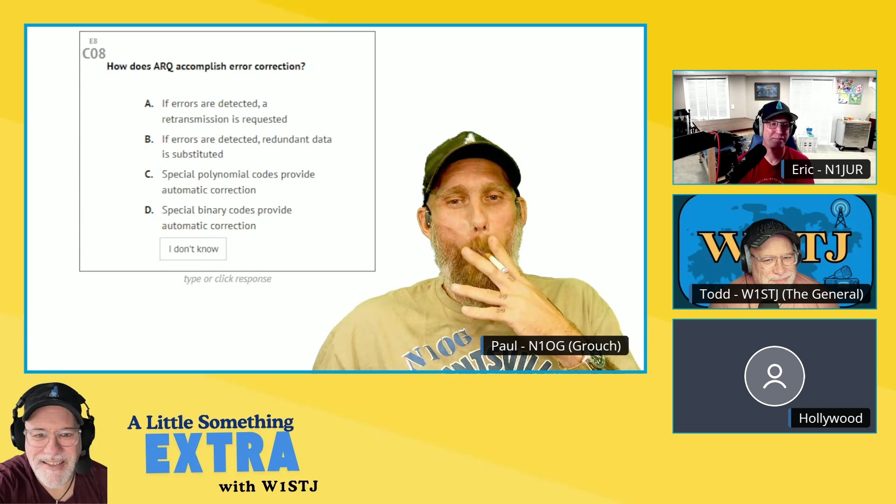And Hollywood, if you'd like to jump in after Todd answers, feel free. Because of course, this one wasn't on anything I've seen in the last 2 weeks, even though I'm studying all of them. But for some reason, I think it's C. Hollywood, would you like to chime in? I don't have a clue. I only fix 50 kilowatt transmitters. Oh, there we go. That solves that problem. Oh, man. I'd have to go with A. I'm almost positive it's an error correction. Obviously, it's in the name.

All right. So Todd said C, and C is incorrect. Eric said A. Ooh, my modem days still stick with me. Bring on AOL. The correct answer is, if errors are detected, a retransmission is requested. And so to further explain, in automatic repeat request ARQ systems, the transmitter sends the data and also an error checking code. The receiver checks for errors and requests retransmission of erroneous data.

The key thing to understand is just in the name, automatic repeat request, sometimes automatic repeat query. It automatically requests that the packet be retransmitted when it detects that the previously received packet was corrupted.

So your hint, when you see ARQ, think request. That's good. Maybe that'll help you. Okay. Or just when it says error correction, just remember retry. Fix the error.

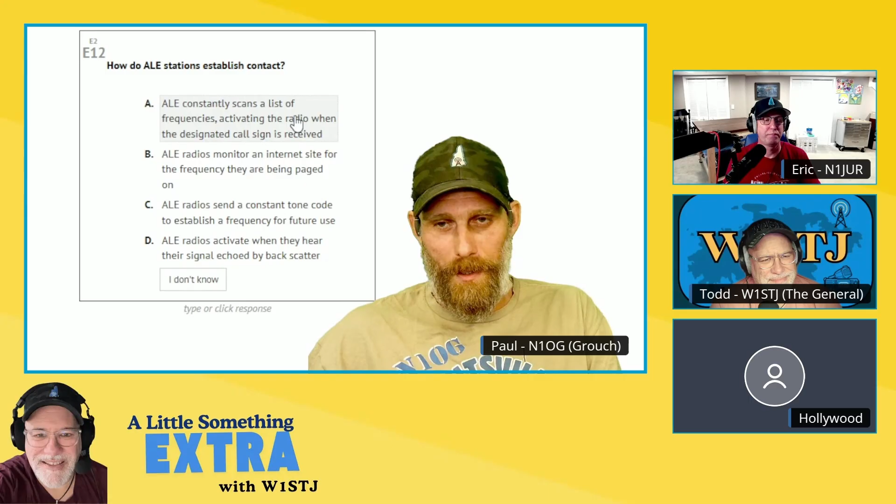All right, I believe it's A. I believe so, sir. You are correct. All right, Todd. Final answer is A. ALE constantly scans a list of frequencies activating the radio when a designated call sign is received. Is correct.

Trifecta for this, buddy. And now I got to hear the damn song. You got to hear the song.

You screwed that pooch tonight. See, Hollywood, so I can't win. If I don't get all of them right, I'm a loser, right? If I get them all right, then I'm good. But if I get 2 out of 3, I got to hear the Meatloaf song. And normally when I get 3 out of 3, Eric misses one, and we still got to get the song. But I'm still an extra. Either way.

So for those that may not know, ALE stands for Automatic Link Establishment, which is the standard for digitally initiating and sustaining HF radio communications in an automated manner. You can think of it as an automated way of calling a specific station and answering that call. When attempting to call another station, an operator enters an ALE address into the radio. The calling radio selects the idle channel, the frequency in its list, and transmits call messages.

On the radio waiting for the call, ALE constantly scans a list of frequencies, activating the radio when the designated call is received. And ION2G is a phenomenal program if you want to learn ALE and get into ALE. It's a wonderful thing. Caveat, you do have to have an auto tuner because it's switching frequencies in a random fashion. You definitely want to have an auto tuner that will tune each frequency before it transmits. Yeah, so there we go. Cool.

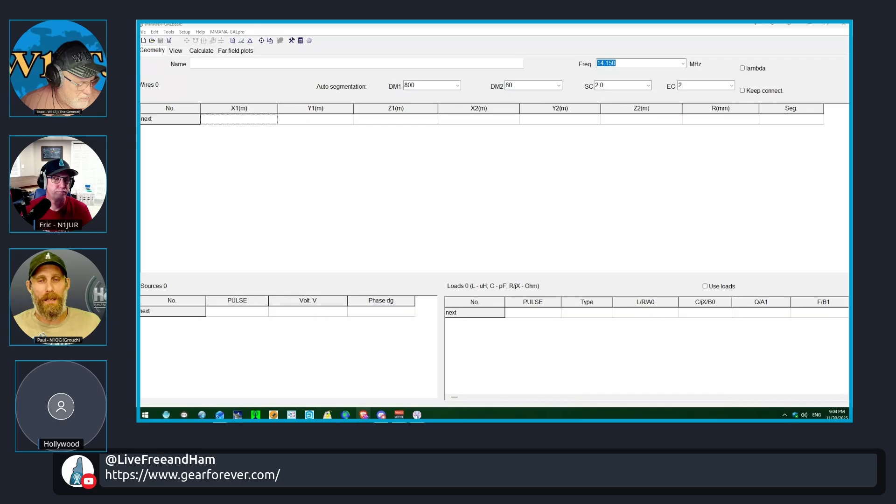Excellent. Okay. So when you launch the software for the very first time, this is what you see. And so Hollywood, where do I go from here? Say I want to understand. Now I had a dipole at my house, and initially the dipole was 40 feet off the ground, and it was 75 feet in total length. And then eventually I upgraded to a little bit better of a dipole that was 140 feet in total length, and I put it 65 feet in the air. So how could we understand the difference between those two setups and what advantages or disadvantages may be at play there? Okay, sounds good.

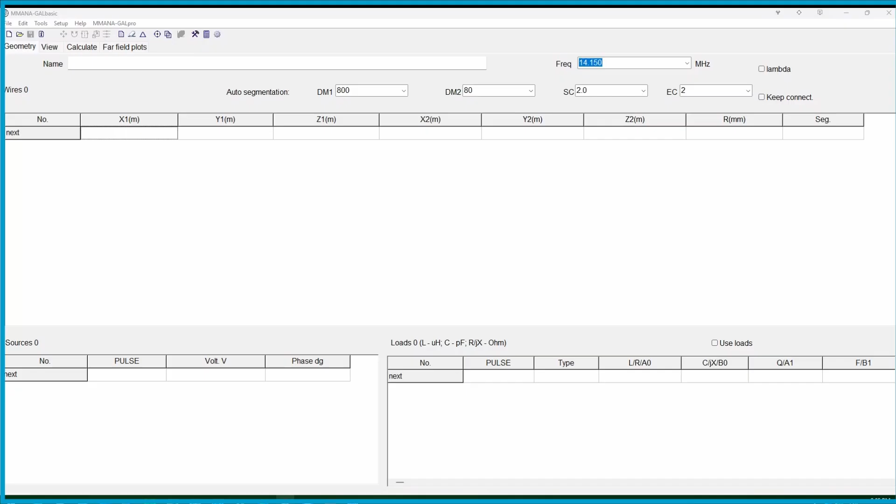So that's exactly what this software is designed to do. This is not the best software that's out there. This is certainly not a real engineering piece of software. It's basic stuff for the ham radio community. I use it all the time. It works great, and it's easy to do. So the first thing that I would recommend, on the screen, at the upper left-hand corner, you'll see 4 tabs: Geometry, View, Calculate, and Far Field Plot. Click on View. Because View, well, let's start there.

This is a 3-dimensional palette, okay? So you've got an X coordinate, a Y coordinate, and a Z coordinate straight up. So this is our blank piece of paper that we now need to draw an antenna on, and then MMANA-GAL will use that information to give us where the currents are going down that wire and what the radiation pattern is expected to be. So this is step 1. We have to draw the antenna first.

Okay. And so what do you suggest that we start with as an antenna? I would do a dipole. Do a simple dipole. Okay. Nice and easy. Yep. And so how would we go about that? Okay. So at the very, you got it. At the very top, it says Wire Edit. Go ahead and click on that.

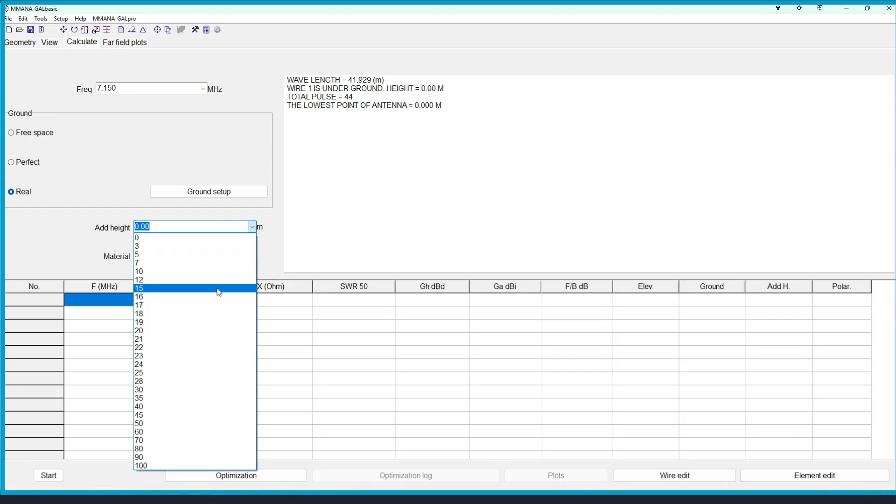So once we've told it that it's not up in free space, it's on or above the earth, we need to tell it how far above the earth it is. So pick a random number, something realistic. I'd do 10. 10 is 30 feet. Yep. Perfect. That's what we need to do. So now we've got our program ready. We say run it, and in the bottom left is a button for that. And bada boom, it does its thing.

So now we've got to put our engineering hat on a little bit. If we look at this, it gives us a spreadsheet. It tells us what frequency went into the wire, what the ohms of the wire are, and the J factor, which is either capacitive or inductive. We can talk about that later if you like, because that's a little complex for most people.

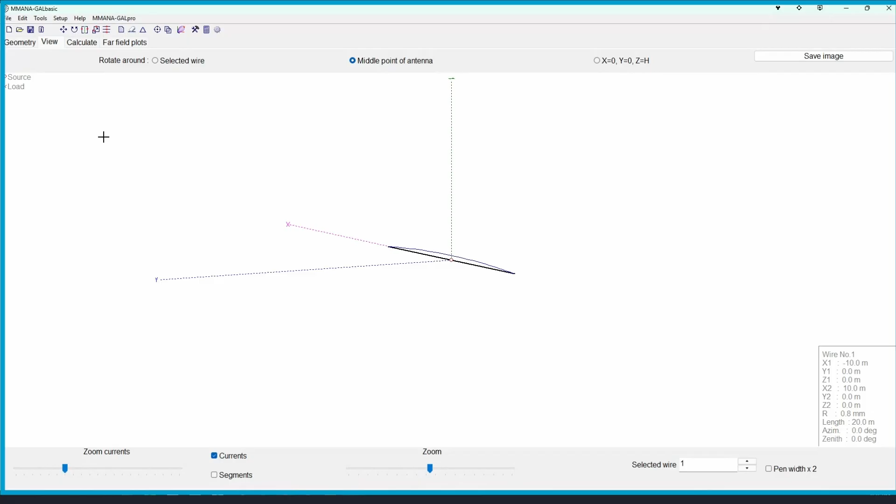Click on the View tab again, and it will show us where the current is on the wire. In the bottom left, there's a slider for zoom currents. You can move that to the right a little bit. On the left, it says zoom currents, the other control. Yep. Slide that over, there you go, just so it's easier to see. What do we got? We've got a half-wave dipole. The blue line is the current on the wire, not the voltage. Okay, that makes sense now. I think that was Eric, right?

So that's a key ingredient here that trips a lot of people up, because traditionally, like in the ARRL antenna book or even the big book, it usually shows the voltage, not the current. Right. So this trips everybody up. We know, without using the software, we've been told, and it is correct, that a dipole is a good match right from coax. Coax is 50 ohms.

A dipole is near 50 ohms. It's a good match. If we go back to Ohm's law, in order for it to be a good match, it has to be a relatively low impedance. The 50 ohms of the coax is a relatively, I'm using air quotes, relatively low impedance. The dipole is also a relatively low impedance. They match. They're happy together.

Okay? So makes sense. So Ohm's law, I'm going to go on a sidetrack, just a quick one here. E equals IR, right? If the resistance is high, you need more voltage to push through the resistance to get the current to flow. If the resistance is low, it doesn't require as much voltage to push through to get the same amount of current.

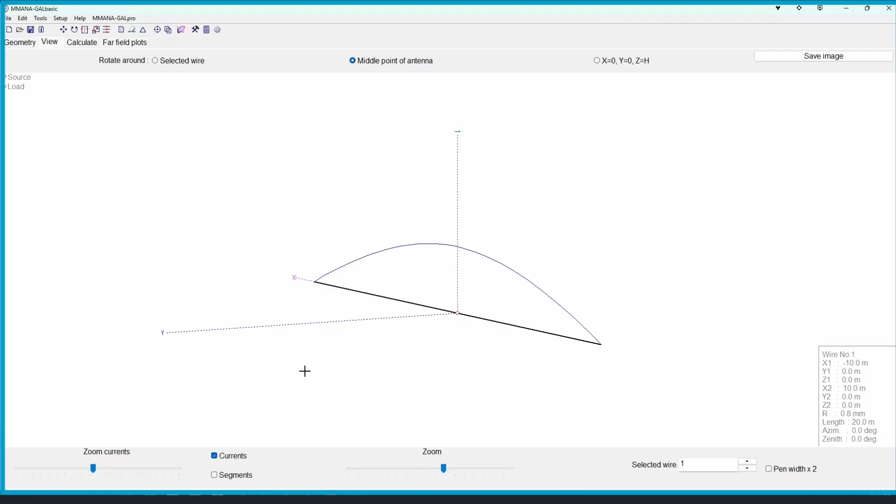Makes sense. Okay? So just by looking at this current curve, this blue curve, I can see immediately that the middle of the antenna is the low impedance point. There's maximum current in the center. And at the ends, there's very little current. Does everybody see that? Yeah, makes sense.

And voltage and current are like a seesaw. When one goes up, the other goes down by the same amount. So maximum current in the center, very little voltage in the center. Maximum voltage on the ends, very little current on the ends. One goes up, the other goes down. Okay? So this is a resonant half wave for 40 meters.

Let's now see, what does it look like? What can we expect for a pattern? If we click on far field plot at the top, that's the fourth tab over.

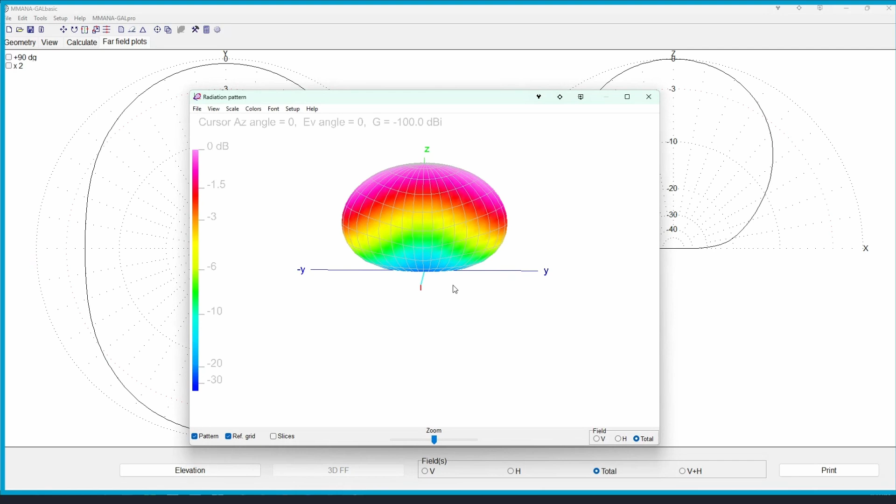So a lot of it does go up, but Callum made a really good statement in one of his, it must have been 2 years ago, videos, and I'll paraphrase it. And what he said was, when you're on the ground, you're an antenna. When you're on the ground, you're like a seagull. Your wings are tucked in tight. And as you start flapping to take off, your wings go out. Once you get up to a certain height, you can soar and you really stretch your wings way out.

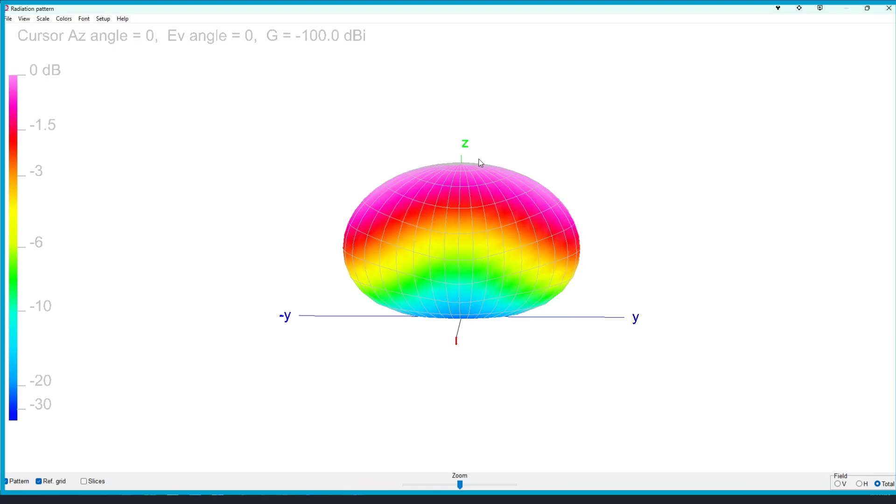The antenna does the same thing. When the antenna is low to the ground, it is physically shorter for the same frequency. And as it goes up in height, you need a longer wire. The wings extend further out for the same frequency of resonance. Mm-hmm. Okay. That makes sense. Okay. So that's a good visual. Think of that seagull thing. So this is where our signal is going.

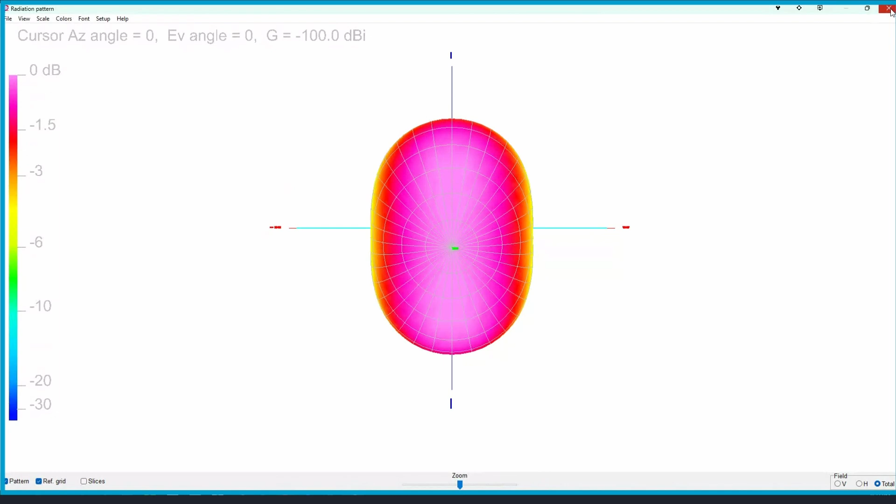In the white. Yeah. And we can draw chalk lines and we can measure roughly what the software is, how many dB gain, is it going here or there? Yeah, we can do that. You know what? In the real world, there are so many other variables that it almost doesn't make sense to do it. It's good to show off and say, well, I've got 2 dB more than you have. But in the real world, it's splitting hairs. You're not going to hear 2 dB. No, especially when it comes to S units. Exactly. It takes 6 dB to go 1 S unit. Yeah, so it's nothing on the other end.

So what I want you to walk away with on this lesson is, where does the signal go and where is the current on the wire? That's the 2 most important things for right now. All right? And where the current is max, that will tell you what the impedance is of the antenna. Let's change this right now, really quick. Let's make it an end-fed half wave. So we'll go to geometry. And under pulse, instead of W1C, we'll make it W1B, Bravo. That's now wire 1 at the beginning.

Question, is there a key somewhere? Knowing these little nuances of defining where your feed point is, are they listed somewhere? Yeah, they're in the manual. Okay. But we're men. We don't read manuals. Yeah, well, that's what I was kind of getting to. So what crazy voodoo did you have to learn? Exactly.

Yeah. So now we've got the little red circle down in the end instead of being in the middle. Right. So before we do the calculation, from what I've told you so far, pop quiz, what kind of impedance do you think it's going to see? And tell me why. Let's see here. Well, and you can phone a friend. I think it's going to be a much higher impedance because you're feeding it from the end. So it's no longer being balanced. Okay.

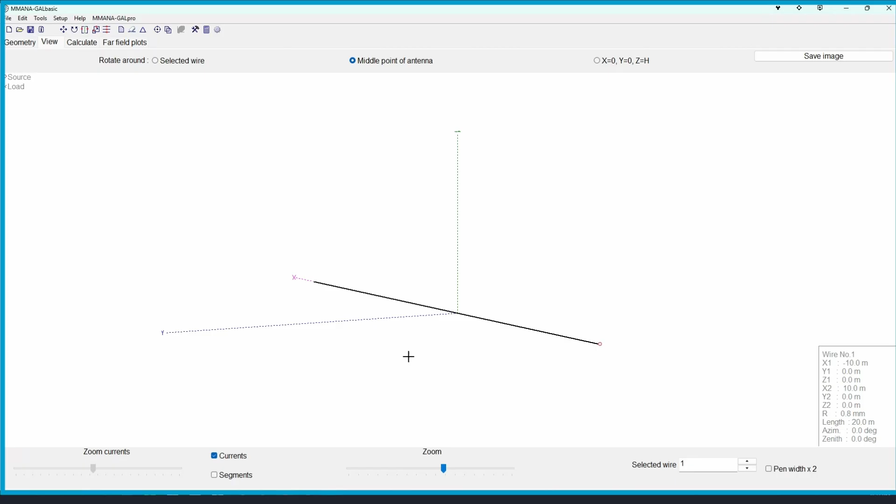Let's see. Go ahead and hit calculate. Place your bets. And then go back to view and look at it. And you may have to move that zoom all the way to the right. That's still in the middle. It's still in the center.

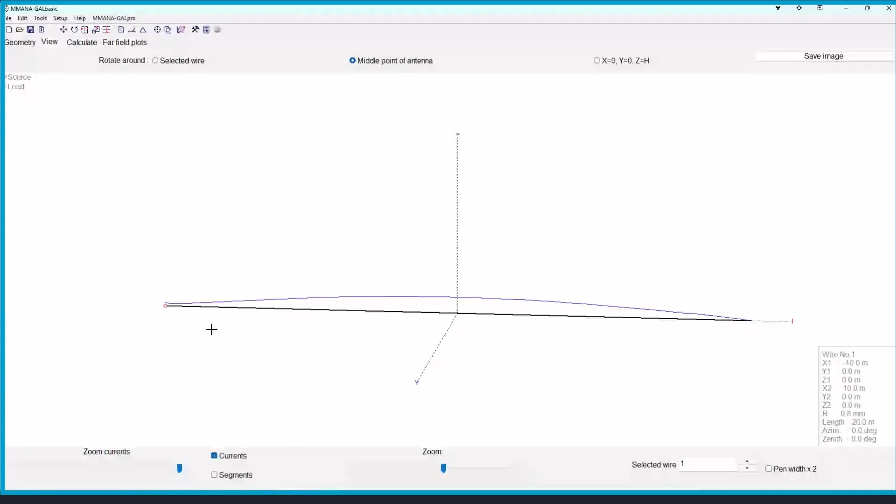Okay. So let me make this analogy. Do you guys play any instruments? Yeah, guitar. I haven't played in a while, but yeah. Perfect. Okay, I got my hand on the neck of the guitar. I'm playing a G note here, and I'm plucking the string. Does the note, I shouldn't say the tone, the frequency, does the note change where I pluck the string? Yeah. The frequency of the note changes? No, I'm talking about just the frequency. Oh.

It's the same note. Yeah, it should be the same note. It doesn't change. Okay, so the feed point is at what point on the string is my pluck hitting the string? That's the feed point. The length of the string is the frequency of resonance, which does not change. It doesn't matter where you pluck the string, you get the same note.

It sounds different. There's different harmonics to it. Right. But the fundamental note that's being played is the same. It's determined by the length of the wire. That's a really good analogy.

I'm a musical idiot. You know, like I learned how to play the bass guitar for a couple songs. But like as a musical idiot, right? That still makes sense to me because if I'm holding my fingers on the neck, it doesn't matter where on the string that I pluck. Right. It's going to make the same sound. Yep. Because the length of the wire that I'm plucking is the same.

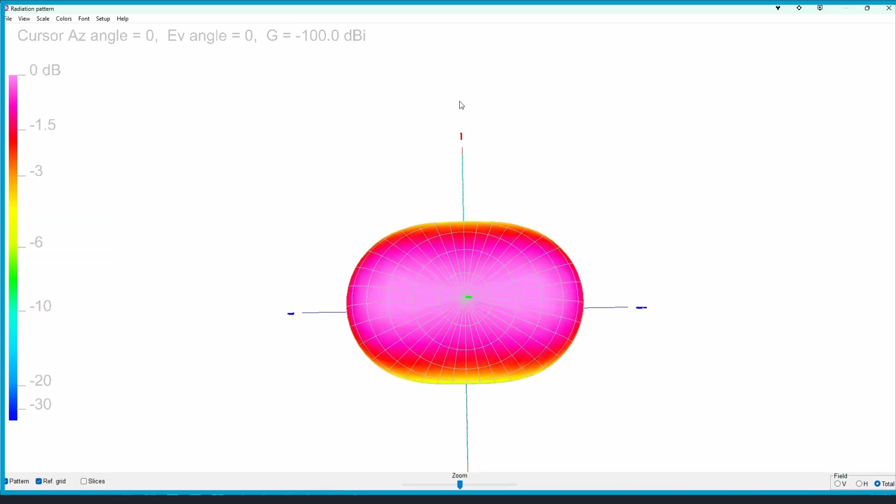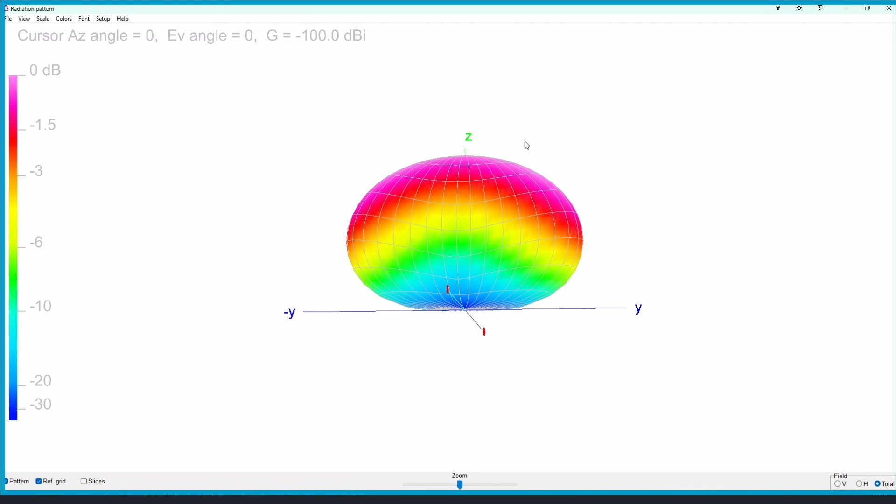It's identical. Yeah. So then here's a dumb question. No question is dumb. Go ahead. So basically it boils down to how much current or voltage you're putting into the wire, or whether you're transforming it up or down in order to change the radiating pattern, keeping the wire length the same, whether it's a dipole or an end fed, whatever you feed it more with in terms of voltage will change the rest of the wire, correct? Am I saying that right? I'm not sure I follow 100%.

Let me see if I can sum it up. And again, I'll go back to the guitar. It's where you pluck the string. So if you're plucking the string harder. Yep. What is that doing to the rest of the wire? The harder I pluck, that's like more amps, more watts going into the antenna. Okay. So if I've got the guitar and I pluck it in the middle, and I have a microphone with a sound pressure meter, and it reads 80 dB. Okay, I pluck it just so, and I get 80 on the meter.

Okay, and then I pluck it at the bridge. I have to pluck it harder to get the same 80 dB on the meter. Mm-hmm. Okay, so it's because there's more resistance at the bridge. So I need to overcome that resistance. Okay. Because the feed line you're feeding it with is 50 ohms. Okay, so we're going back to antennas, right? So if I feed it in the middle, it's a low impedance point. It's a lot of current right there that it will accept.

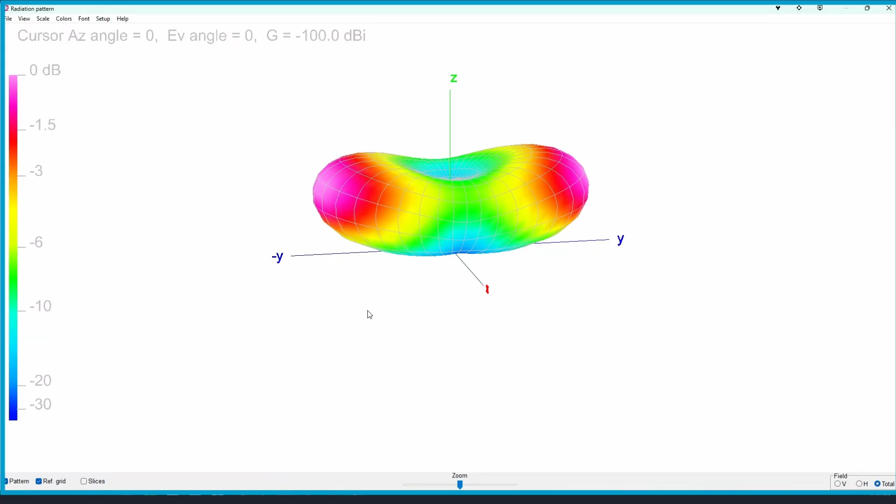Think of that wire as a light bulb. There's no shade on the light bulb. It's not a flashlight with a reflector around it, right? That would be a Yagi. This is just a naked bulb that I'm holding in my hand connected to a battery. The light goes everywhere. It goes up, it goes out to the sides, it goes down, right? If the ground were a mirror, and I put the light bulb a foot above that mirror, some of the light is going to go up from the bulb, and some of it's going to go down, hit the mirror, reflect and go straight up also. That's when the bulb is close to the ground.

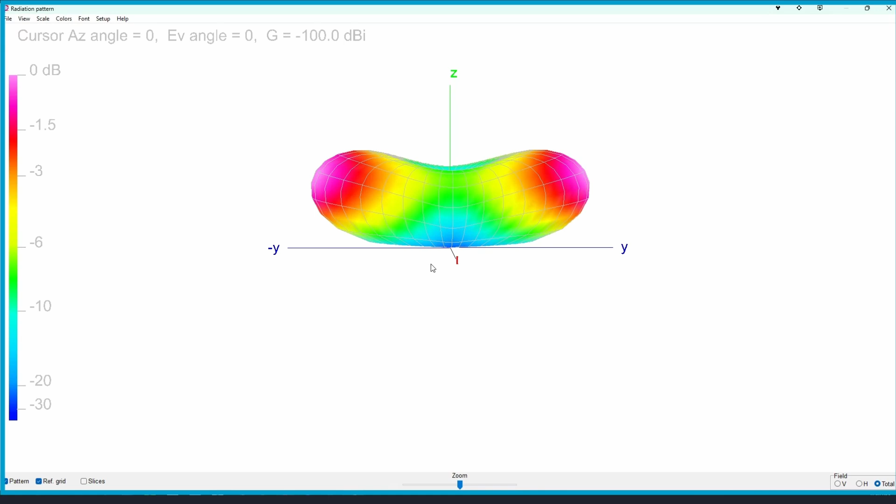So we're reflecting off the ground always as we increase the height? You're always reflecting off the ground, unless you're in outer space. The higher up you are, the less reflection off of the ground, and the more coming just from the wire. Well, question then: what does it look like in free space? Let's do it. Great question. Yep. Space. That's right.

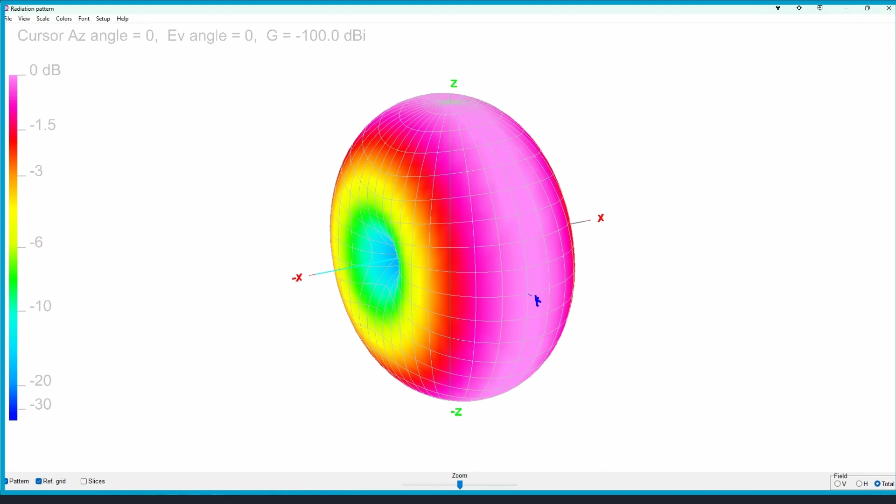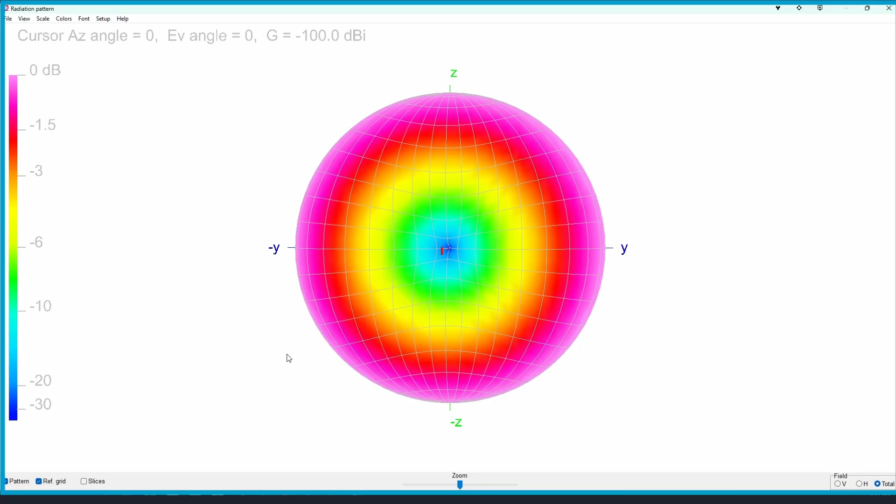Big giant RF. Perfect. Interesting. Look at that. Yeah, big donut. So you see what I said. If it was a bulb, the signal is going out of the bulb, it's going up, and it's going down. This is in free space. It's a satellite now. But notice there's no signal coming off of the ends of the wire. It's very narrow, because that's where the voltage is, not the current. It takes current to... Remember, radio waves are an electromagnetic field.

The second half of it is magnetic. And you need current to go through. Did you ever make an electromagnet with a D battery? Oh, yeah. You wrap a wire around a nail? If you disconnect the battery, there's no current and the thing isn't a magnet anymore. Right? So a lot of the RF, it needs both. It needs voltage and it needs current.

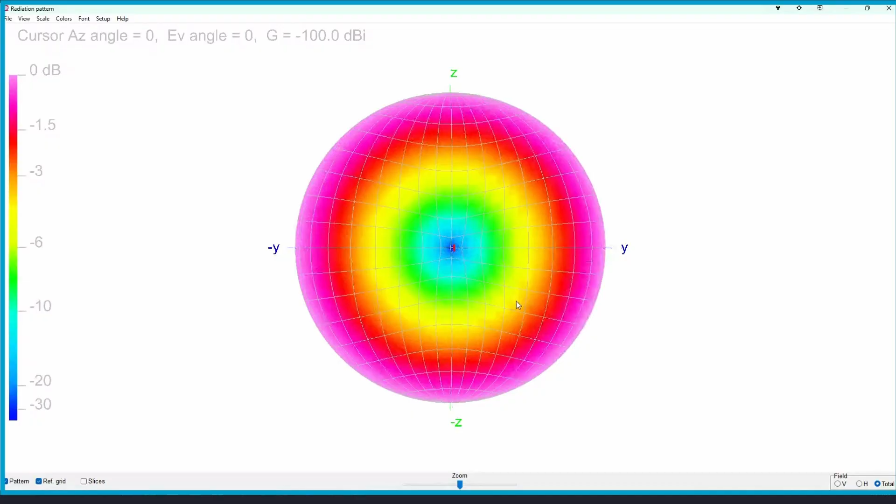So then why do we model in free space at all? What's the pro to doing it in free space? Bragging rights. Because it's theoretical. In free space, you can say how many dBi, and dB is decibels, and the I is short for isotropic radiator, which means what we just drew. It's a wire in free space, and that's not the real world. When you draw a dipole, that dBi becomes dBd for dipole, and you lose almost 3 dB right out of the gate.

Okay. Because the far field plot that we had before, on the y-axis, I had a 5.5 to 6 dBi gain. Whereas now we're in free space, it's maxing out at 2.2. Right, because it has nothing to reflect off of.

So is there diminishing returns in terms of height for an antenna? Oh, yes, absolutely. If you are a DX contest station, what they will often do is on the big tall tower, they will put a bunch of Yagis at different heights, and they will select them depending on where they want to talk to. They're all aiming at the same azimuth, but they're at different altitudes.

So that incoming wave from Europe might come in at a 10-degree angle, and you want to use the antenna at the top of the stick. But something closer might come in at a 30-degree angle. You want to use the antenna towards the middle or the bottom of the stick. Not the bottom, but lower. Correct. So it's a three-dimensional thing. That's a great question.

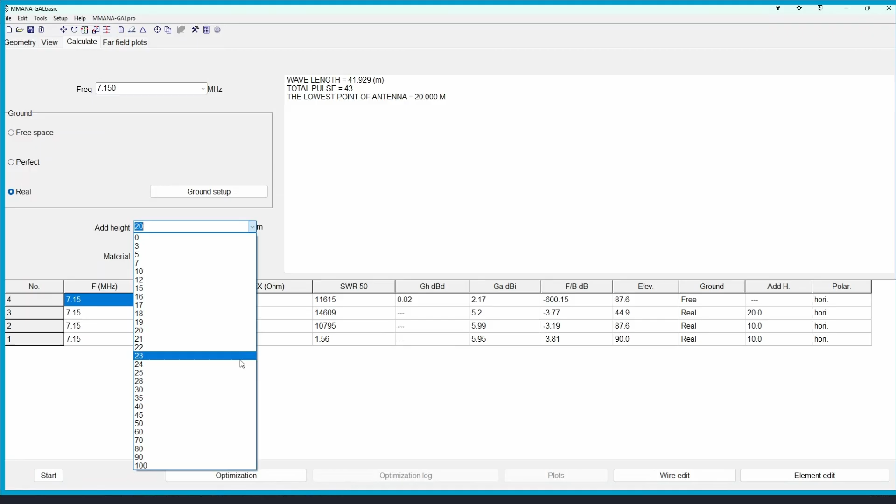So in terms of antenna, obviously physical limitations like trees would dictate why I would choose a dipole over an end fed, but with that eliminated as a factor, is one better than the other? Does it really matter? In my opinion, the dipole is more efficient because it's a monoband antenna. It's designed to do one thing and do it very well. Mediocre to good. It's not the best antenna, but it works every time, pretty much.

The end-fed antenna, its claim to fame is that it will work on harmonics. It will play the main note, but it will also play the second and the fourth and the eighth harmonic. And our ham bands are set up that way. So you kind of get a free lunch. So your end fed's giving you a little more versatility versus a dipole. However, it's not a perfect world, and the price you pay for that free lunch of using the other bands is that there are losses in the transformer.

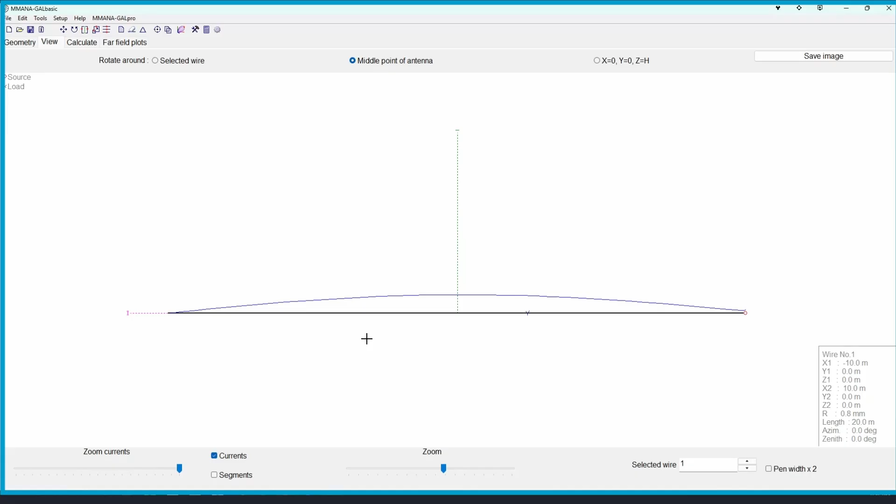And the end-fed half wave is a fixed height. You're shooting it over a tree limb, you're doing POTA, you're not changing the height. But when you change frequency, the electrical height of the antenna changes because the wavelength is shorter. If you're using it on 40 meters, it could be lower to the ground electrically than if it were 10 meters. So there are more losses. The lower you go, there are more losses generally.

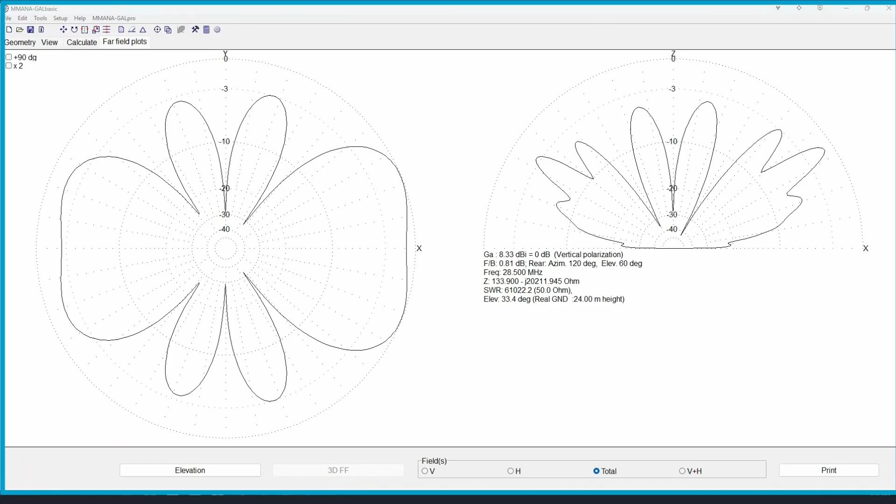Let's look at it. So what do we got? We ran it for 10 meters here, for 28 megs. So let's look at the 3D far field plot. And what we'll find is that there are what are called lobes in the pattern. It's not a nice, simple pattern. It's a whole bunch of fingers now because there's an interference pattern. The antenna is radiating on, what is it, the fourth harmonic now?

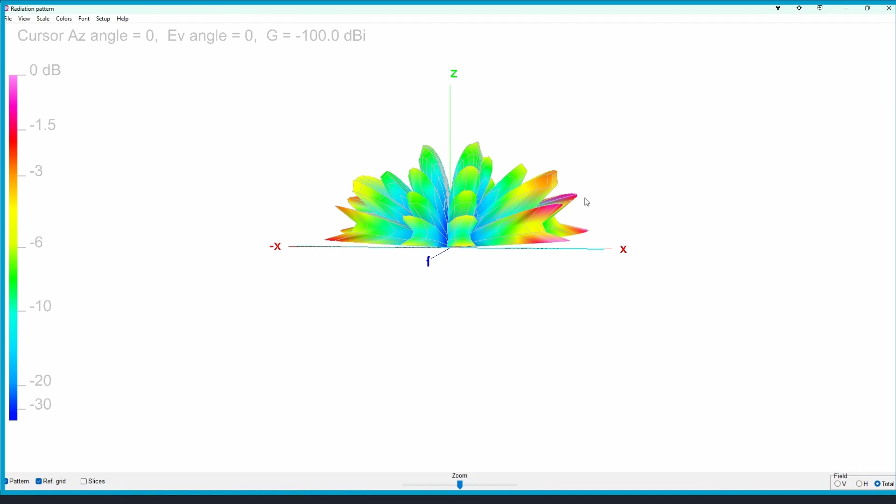And is that why we get the harmonics? Well, no, it's why you get the interference pattern. Ah, okay. Because this is as though I had 4 dipoles, but they're not all firing at the same time. Number 4 is the most delayed, and number 1 is the least delayed. Just on a sidebar, this is kind of how phasing with verticals works.

Yes. Okay. Bingo. Right. That makes sense. Now it's clicking. Yep. Okay. The light is turning. Good. I love it. Okay.

So this is just a simple piece of wire, but yes, it has a phase delay. So if we feed it a 40 meter signal, there is no delay because it's only one hump. And if we do it at 20 meters, there's 2 humps, so one will be delayed behind the other. The higher the harmonic goes, the more humps there are, the more delayed the one at the end of the string is from the one at the beginning of the string.

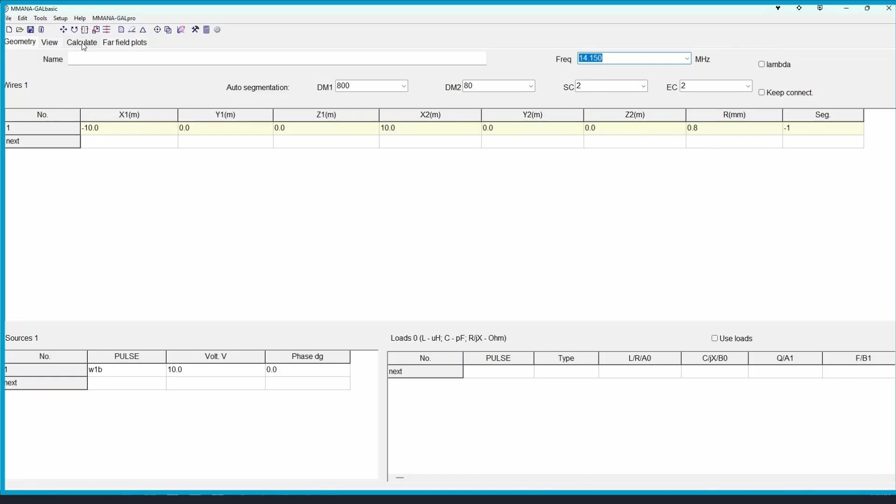So there's an interference. It's just like dropping 2 rocks on a pond. If you drop them at the same time, you get a certain interference pattern. If you delay one a little bit behind the other, it changes that pattern. And that's what MMANA is really good at. So using your rock analogy, you drop the first rock in, it creates its circle. Then the second one, until it starts to intersect those other circles, at that point that's where the phasing and interference comes in.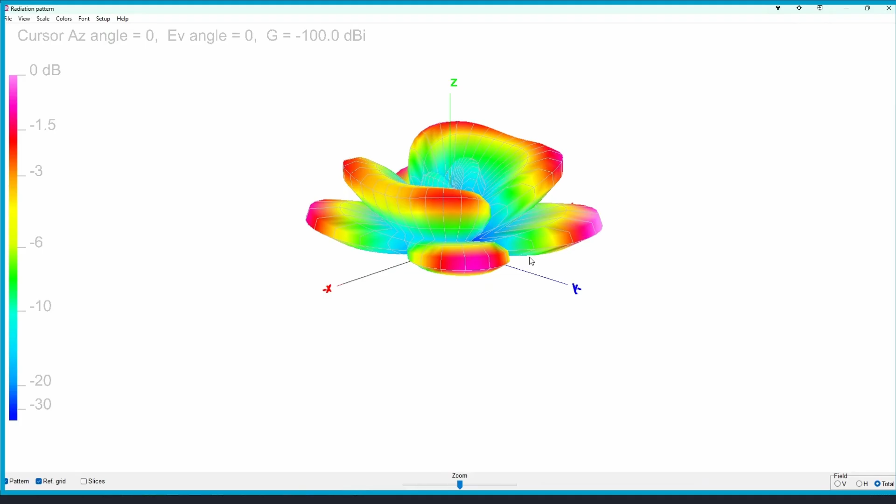Got it. Exactly. It's just that simple. It's hard to conceptualize, but once you get it, then you can plug it into the software and you can kind of guess what it is going to do. And then you confirm it. A practical application, how does that affect the performance of the antenna?

These interference points. Okay. So what my mentor told me, and I'll repeat it here, is you build an antenna to put the maximum signal at the target. That's your first goal. Once you've done that, then you match it. You make it play on X number of bands, and you have a good SWR. So those come after. But the first thing is you have to get the signal to go where you want it to go, at the best efficiency. That's the primary goal.

Makes sense. Because if we do it backwards, if I say SWR is the most important thing, guess what? I have a dummy load that does that. My dummy load has a perfect SWR. It doesn't radiate, but it solves the problem. It has a perfect SWR.

Well, it's funny you said it because I've been a ham since '93, and that was always the factor that was drilled home all the time. Make sure your SWR is as low as possible before you even start to transmit. And now that I get into this phase, it's really just that the coax and the radio want to be able to talk to each other happily, and that's all it boils down to. Right. There's 2 main reasons why that's drilled into our head.

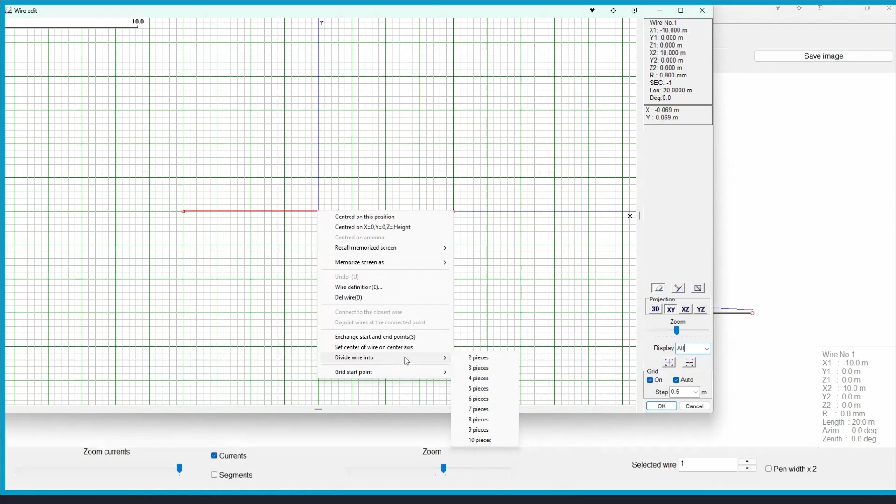What we're going to do is we're going to right click on that red line. And we get a pull down menu. And we're going to select divide. It's down toward the bottom. Divide. Let's cut it in half. Divide by 2. And then let's grab the middle and pull it up. Yeah, and then release it. There you go. So it's over the tree branch, or it's on a carbon fiber pole, let's say. Click OK.

What did we do? We've got it lying on the ground. We need to spin it. Okay, we can do that. Easy. Up at the top, above the word calculate, there is an icon to the left of that, that's rotate. Click on rotate. Let me think, we need to rotate it by 90 degrees. The question is, is it on the Z? No, it's on the Y. So click on Y. And it automatically defaults to 90 degrees. Doesn't matter whether it's clockwise or counter. Click OK.

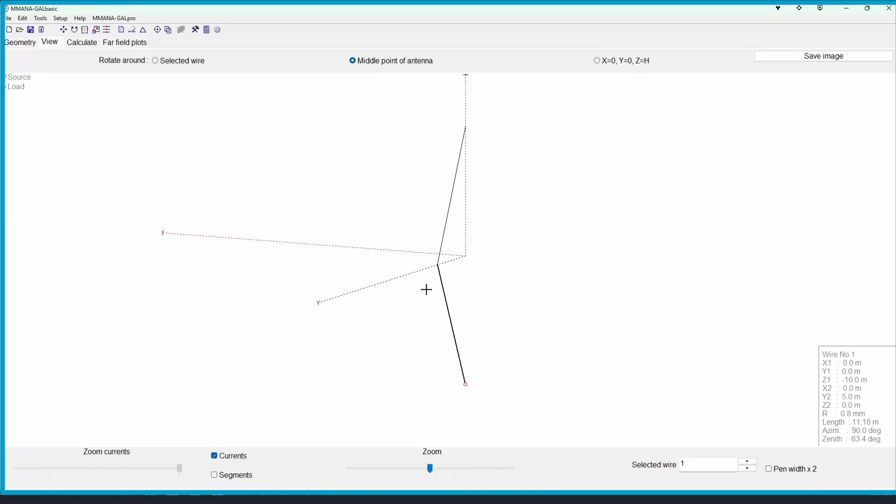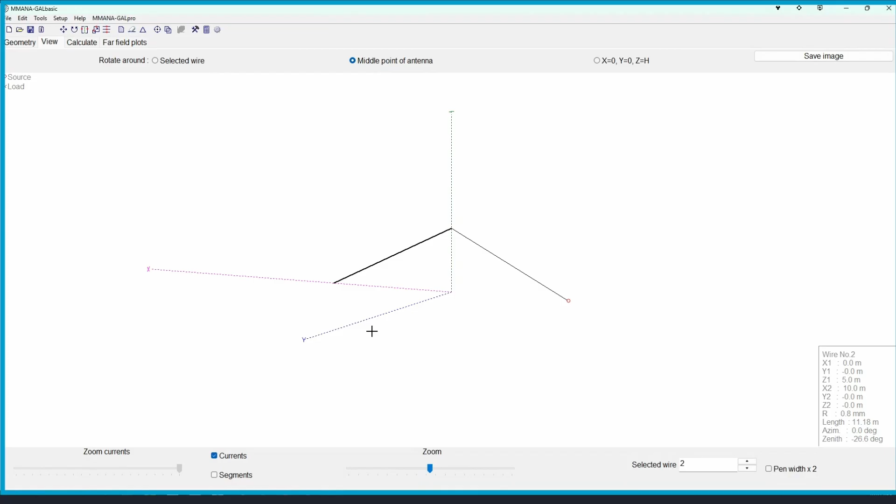Still didn't go the right way, did it? No, it must be Z then. Try a whole bunch of things. You'll get it right. That's what I do. So click on the rotate button up top. We'll go back to Y. Go clockwise. We get it back to the way it was. How about X? So X, 90 degrees, counterclockwise. There we go. You got it. That looks more like it should be.

Now, the next thing we need to look at is when we go to calculate, I think we still have this in free space. So, it's in real. Okay. So let's lower it to a normal height. And this is the ends of the antenna, the lowest point. I don't know where you're putting it up, Paul, but if you're at POTA, you're not starting the antenna at 30 feet off the ground. The middle might be 30 feet.

So I would recommend, for right now, in add height, type in the number 1, because most people have got it pretty darn low to the ground. And then remember, these are in meters, so 1 meter is 3 feet. Which is for an end fed half wave in an inverted V, 3 feet for the feed point is perfect, in my experience.

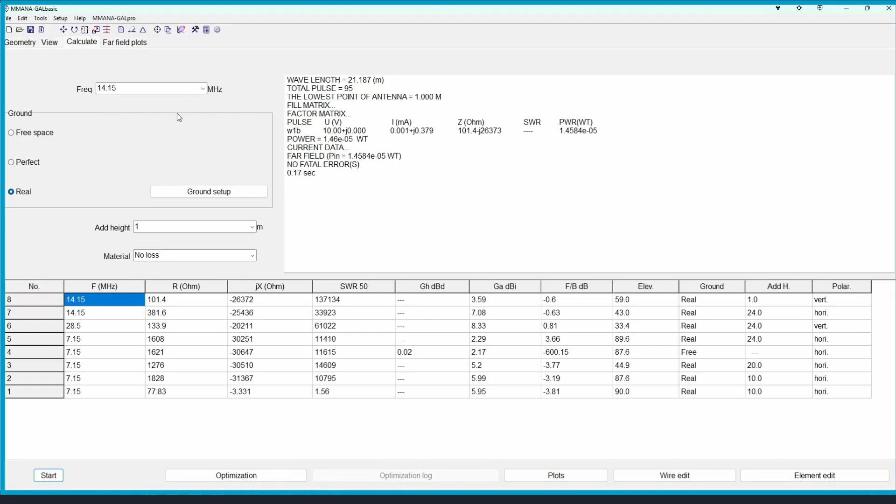So now we also modeled this for 20 meters again. So this is what we expect to see for 20. Click on 3D FF because I think that's easier for people to visualize, to see the color where the thing is going to spit the energy out. And we can see our blue line. That's our antenna. Oh, wow. That is very directional. But boy, look at that. It's still very NVIS.

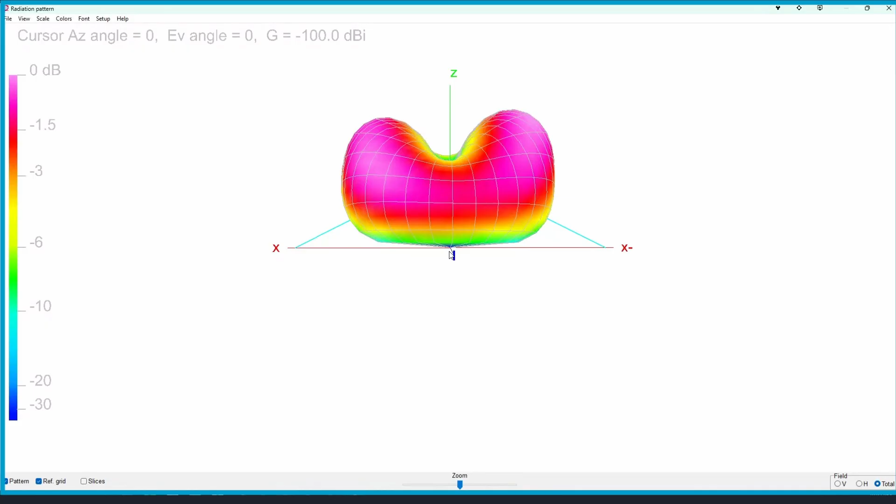Correct, because it's so low to the ground. And we're feeding this still off the end, right? Yes. All right. That makes total sense. Run it again for 10 meters and look at it. So instead of 2 lobes, we're going to see 4. Change it to 28.5.

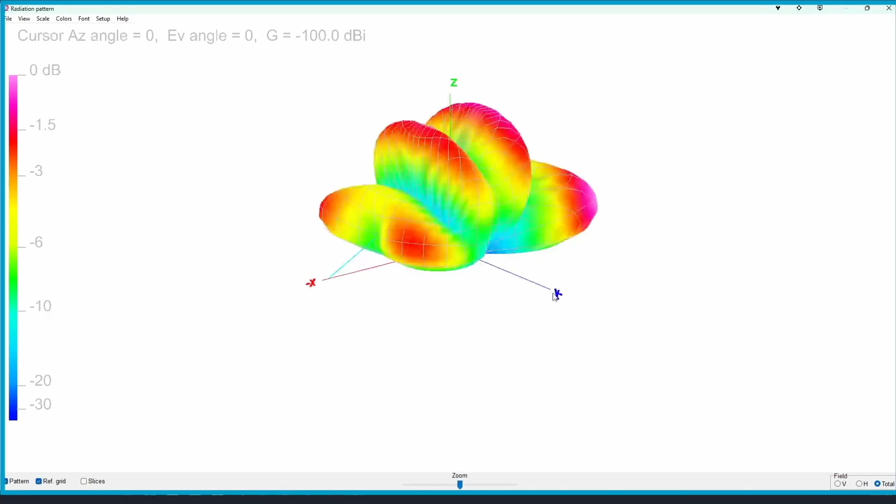Boy, look at that. Couple of lobes. So what happens is, again, the antenna has a delay as the signal goes down the wire at the speed of light, or almost. There is a delay at the end, so there's an interference that way, and there's also a reflection off of the ground that's changing the interference pattern. It's both.

So with this setup, how does a ground radial work? How would it affect this antenna? Because right now it's obviously just using the ground as a reflection point, but what does a ground radial do? Depends on where you put the ground radial. Okay. If you put the ground radial directly under, if you're making like a reflector, you put it underneath the antenna, because let's say you're on sandy soil.

You're not by the ocean now. You're in the desert. Let's say in this example, you've got sandy soil, no water content. Therefore, the reflectivity is very low. So there's a lot of losses in the ground, and you need that signal. This is why I asked if you guys play golf. I don't, but it's a good example.

If you're in the sand trap, you need to use a different club to pop the ball up and out. Okay, that's the takeoff angle of the ball. If you're teeing off, you're going to use another different type of club because you want a low trajectory, a low takeoff angle. So again, it gets back to where do you want the signal to go?

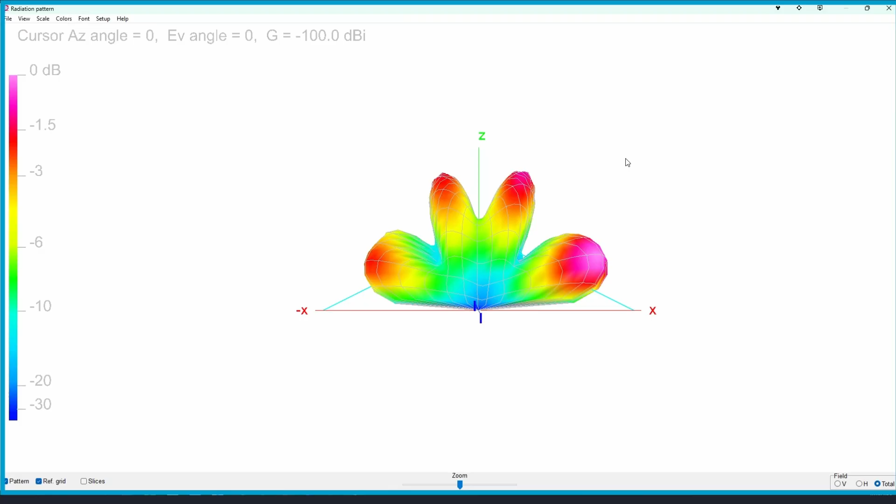And end-fed antennas, they also pick up noise a lot. It doesn't matter if you're at POTA in the middle of the park, there's not a lot of noise. But if you're in your backyard and your neighbors all have switching power supplies and battery chargers running, it's going to pick up more noise than most other antennas. Okay. Because it's high impedance. And that's traditionally the design of the antenna. Yeah, it's a high impedance antenna. Where you're feeding it is a high impedance.

And is that also a safe bet to say for an off-center fed because it's similar in design? Right. An off-center fed will get less noise than an end-fed, but more noise than a dipole antenna fed in the center. Got it. Because a dipole antenna is balanced. You're feeding in the middle. It's equal on each side. Once you change that feed point and you start moving it to one extreme, it's off center.

It has less and less to push against. Yeah. Okay. And then you end up with common mode current. If you're using coax wire, I wish I had a diagram to show you. I do actually, if I was more prepared. That signal loops around. It doesn't all get eaten up by the one side connected to the shield. Some of it folds back upon itself, and it comes down the outside of the coax. And then we talk about putting chokes on and all that.

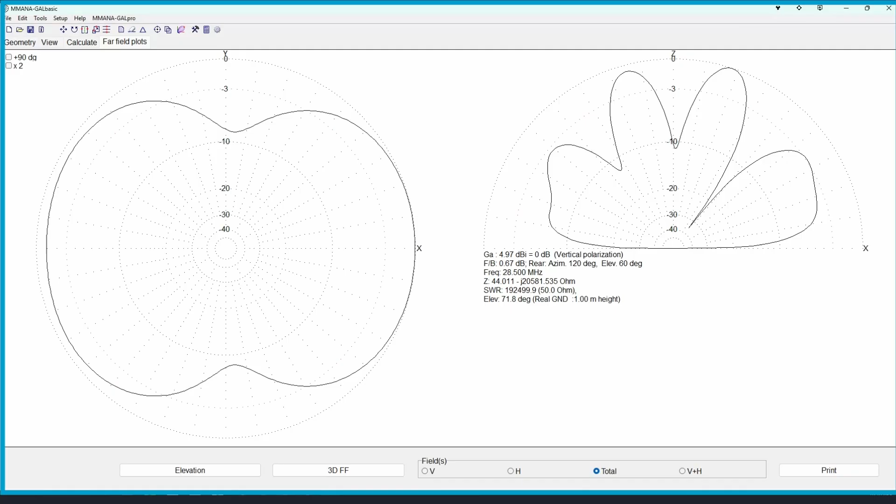Let me see if I can share my screen because I have MMANA already set. Yep. And if I go here, okay. Do you guys see MMANA from my screen now? Just waiting for it to pop up. Okay. Did you? Nope. Nothing yet. Did you share your screen out? Yeah, I did. Let me go back and check one more time. Choose what to share. Oh, that's why. Select. Okay, got it. I want to share the entire screen. There we go. Now you should have it. Okay. Let's wait for that to come on. Nothing yet.

Sometimes if you just do the window, like if you go to the window tab and do MMANA as a window. So I did entire screen, and I see it. I don't see it popped up yet. Let me just switch views and see if that did it. No, didn't bring us back. Try going under window and then select MMANA there. Okay. There we go. You got it? It's coming in. All right. I wonder, does the video have to be on to do that? No, I didn't think so. If it doesn't work, no problem. We'll go to Plan B. Yeah, let's go to Plan B at this point. Okay, got it. Want to pull up yours again, Grouch? Yeah.

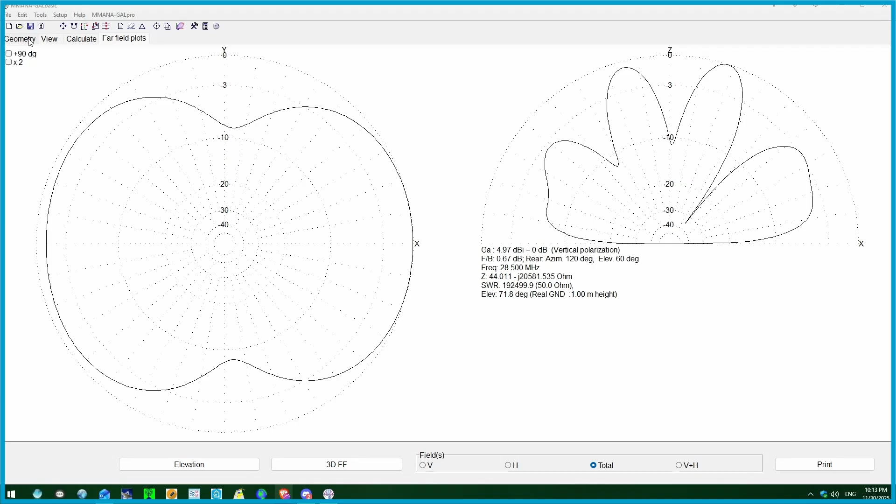Good. Okay, so we're going to click on New. Should be in the upper left-hand corner. And we're going to say no, don't save that. Right. So now we've got a blank piece of paper again. So we need to draw a vertical. Yep, you got it. That's correct. And instead of XY, we want to be in XZ or YZ. So over, yep. And go to the center, just draw a vertical wire. Not too big. How many? Well, that's what, 25 meters. Okay.

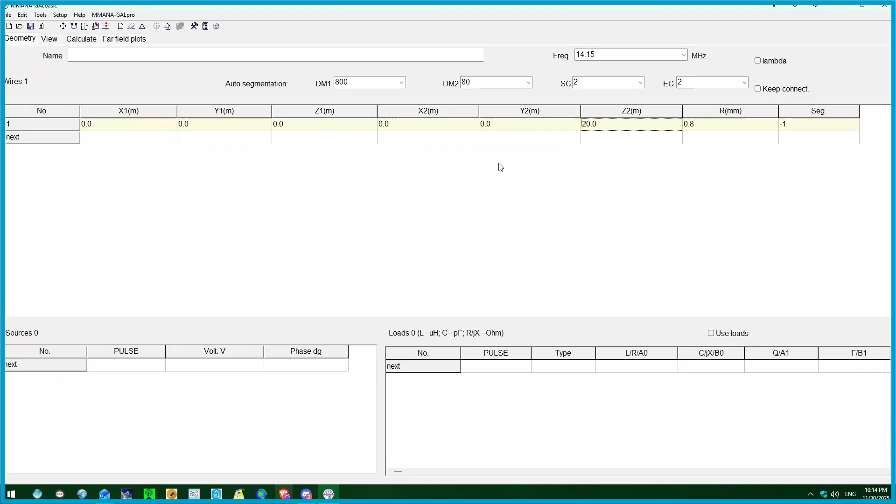So let's change the length of that. Let's go back to wire edit and let's make it 20 meters tall like we did the 20-meter doublet or dipole. Yeah, you can do it that way too. You can edit it. There we go. And it says wire 1 in the bottom right-hand corner, and it should say 20 meters tall. Yep. Okay.

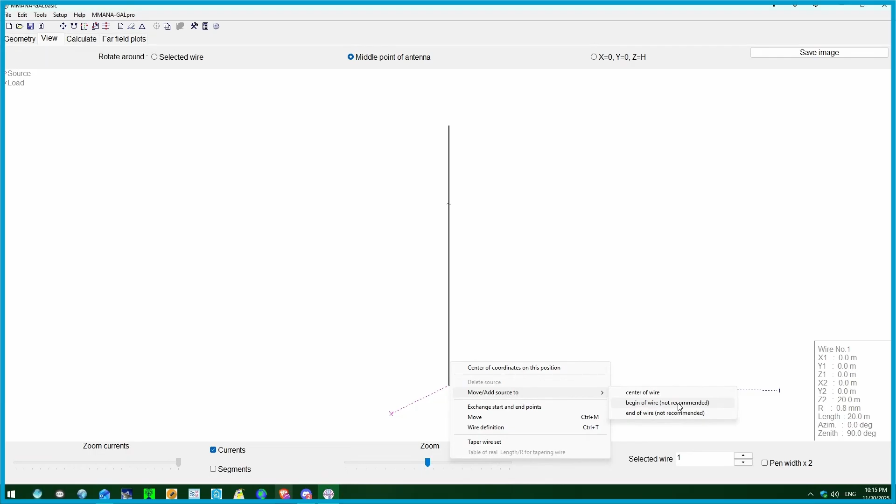So now that we've drawn our wire, we need to give it a point on the wire that we're putting the RF into. And since this is a vertical on the ground, we're going to feed it from the bottom. When you drew the wire, most people start from the bottom and they go up. So the bottom is going to be the beginning, right? You got it. You're already there. Okay, so we've got it. We've got a point. You can do calculate. Yep.

So 20 meters, sure. So it's 20 meters tall. So a quarter of 20, because it's a quarter wave. Well, I should shut up. You do your thing because I want you to see what it does. Okay. So a 20-meter wire for 20 meters. Think what it's going to do first. Yeah, what do you expect to see? And then hit the start button, and let's see if you're right. I don't see it as going well, but no fatal errors. Okay. That's fine.

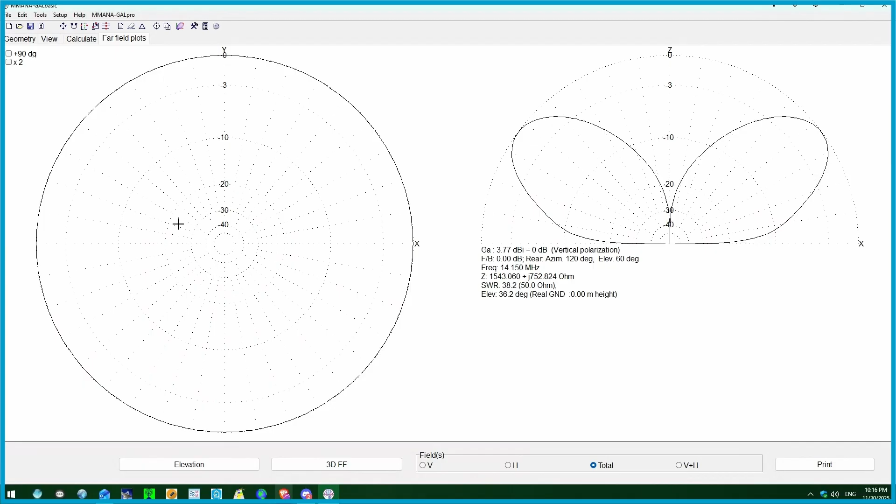Well, first of all, you know what? Go to the view menu now that we've run the program. So look at where the currents are. It's a 20-meter tall pipe. It's 20 meters tall, and we're feeding it on 20 meters frequency. Oh, yeah. So does that really explain why there are 2 current loops? Yeah, it should be 10 meters. Okay, let's look.

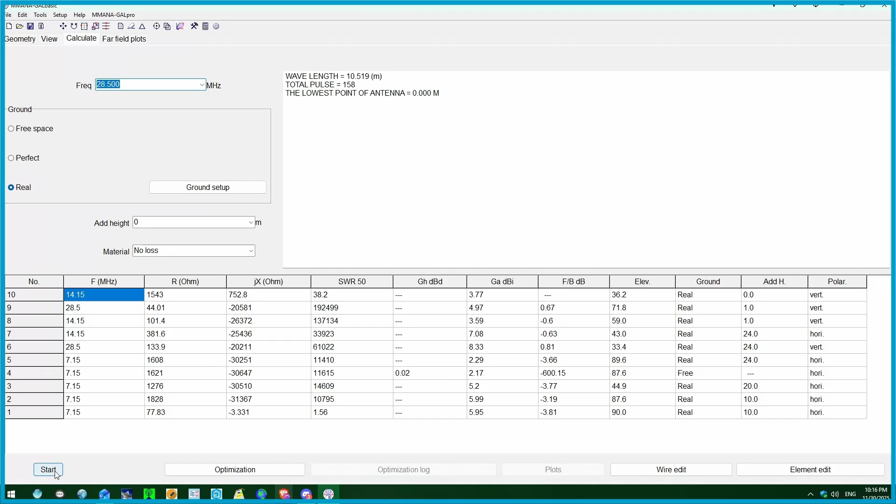Oh. Whoa. So think about it. It's 20 meters tall. Actually, it wants to be 40 meters. Yeah. Why? Because then it's a half wave. Right. It's a half wave. Now, where are we feeding the energy into the wire? At the base. Right. And just by looking at that picture, can you tell me if there's high current or low current there?

That's high. Why do you say it's high? Because it's separated far off from the feed point, where if it was a low current, it would be close to the feed point. Well, it looks to me like halfway up the wire is where the high current is. Yeah. Well, yes, but correct me if I'm wrong, wouldn't a true half wave, the dip would be at the feed point? Yes. If it was horizontal, yes.

But my question was, where we're feeding it at the bottom, is it a high current or is it a low current? I would still say higher. Well, I didn't say higher. I said, is it high or low? All right. You got 50-50. So if you look at the curve, high is in the middle. So it's relatively low in comparison to the rest of the antenna. Yes, that's what I want you to see. Exactly. Right.

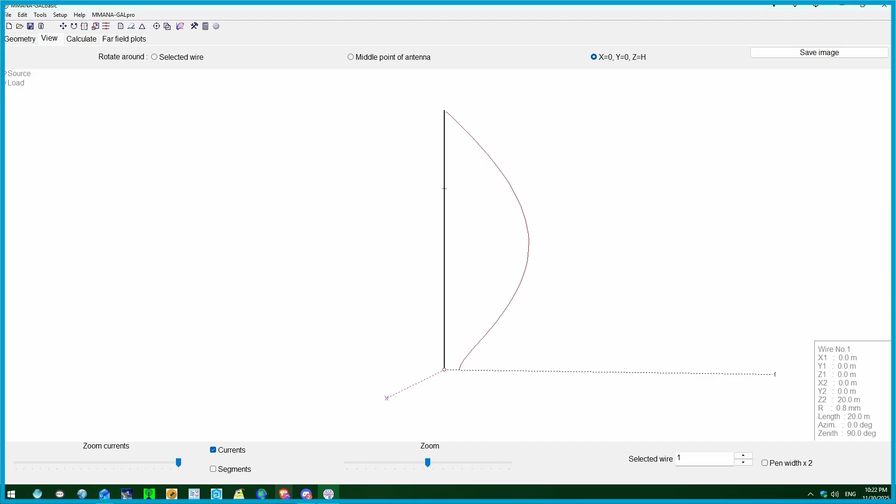You could also take that wire, Eric, and do what's called a delta match. You could feed from the center, measure up a couple of feet vertically and a couple of feet down from the center, and that's where you attach your balanced line. It's still balanced. It's no longer in the center, it's toward the ends. It doesn't have to be at the end. Delta match, what's that? Never done one. I wish I could share my screen and show you.

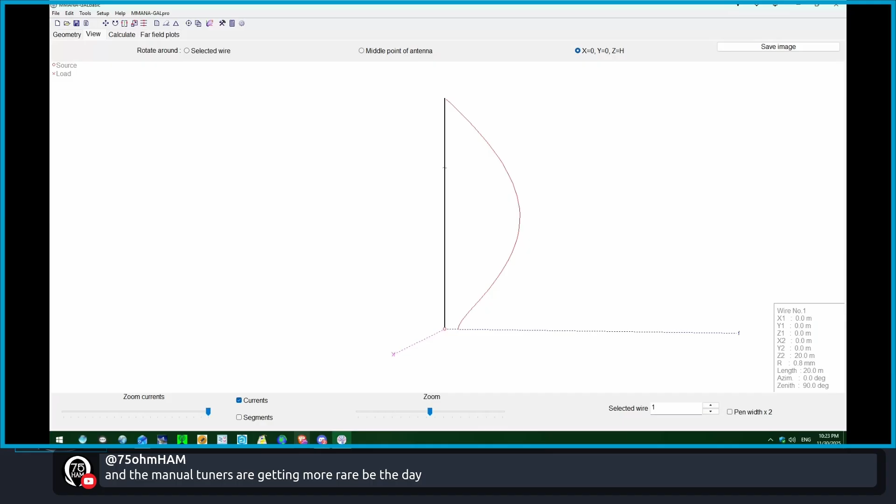Visualize this for a sec, forget about balanced line. We know that the further out to the ends it goes, the higher the resistance is. In the center, it's roughly 50 ohms. At the far end, it's 5,000. Somewhere in the middle, between those two extremes, is 600 ohms. The question is, where is it? You have to guesstimate and interpolate and try a few things.

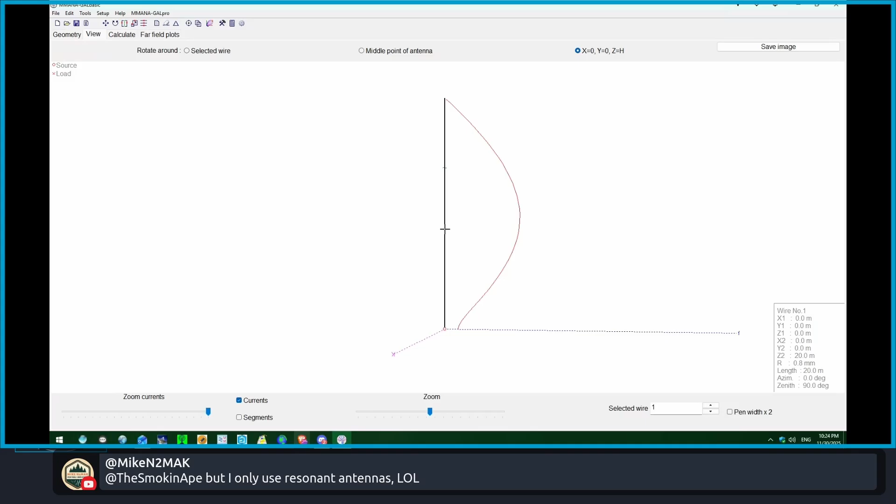If you go a certain point above the center and attach one side of the balanced line there, and then go the same distance down from the center and attach the other side there, and you raise the antenna off the ground, it can't be touching the ground, then it is also a balanced antenna, and you can feed it with balanced line. And it has to be isolated from the ground, not just physically off it. Yes.

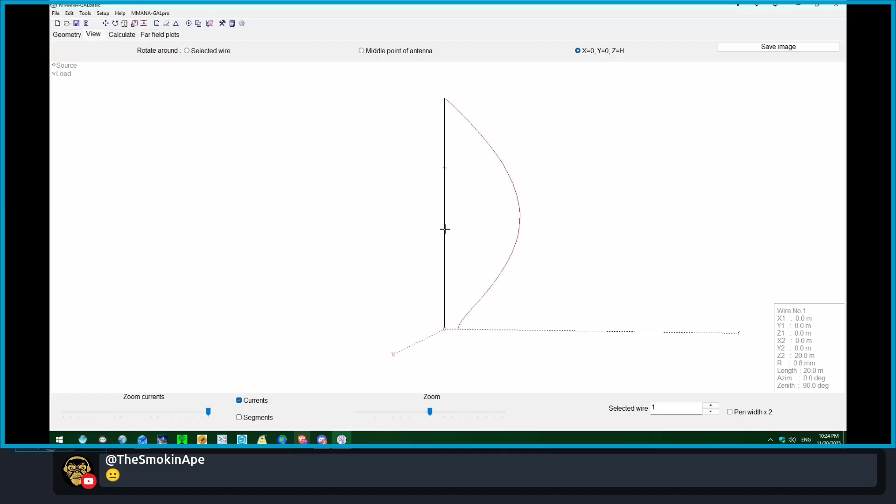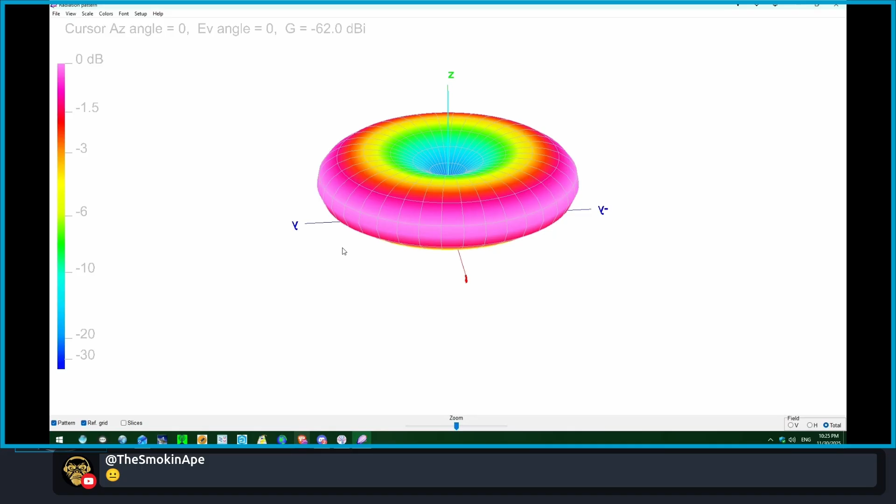When it's on the ground, it's an unbalanced load, and we're feeding it against the Earth. The Earth is the other half of the dipole, if you will. One other thing: if I feed it as a vertical, I've got radials going out left and right. Let's say I only have two radials, one to the right and one to the left. Because they're in opposite directions, as the RF goes down those two radials, they cancel each other out. They do not radiate.

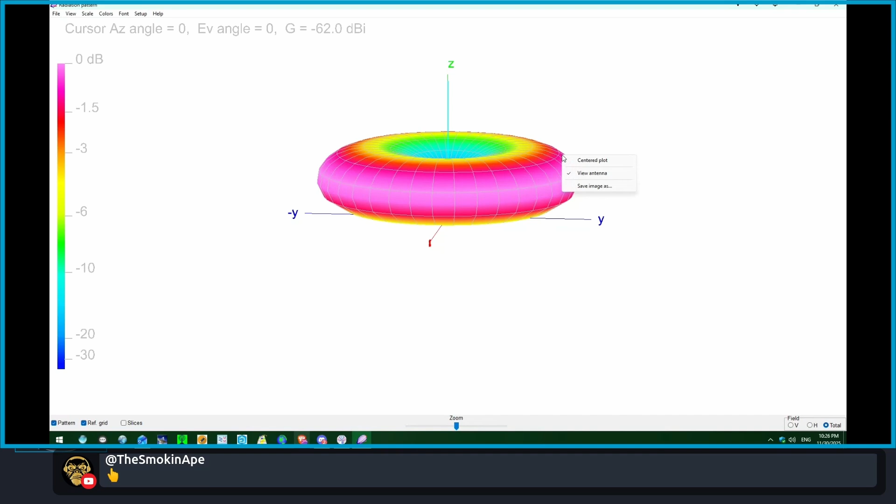So say you have more than two radials, say 4 on the ground. Are there any pros and cons to having your radials different lengths, or is it better they be tuned, the same lengths, equidistant spacing? Does it really matter your ground radials be equally spaced and laid out in a clear fashion? If you're an AM broadcaster, yes. If you're a ham radio guy, not so much.

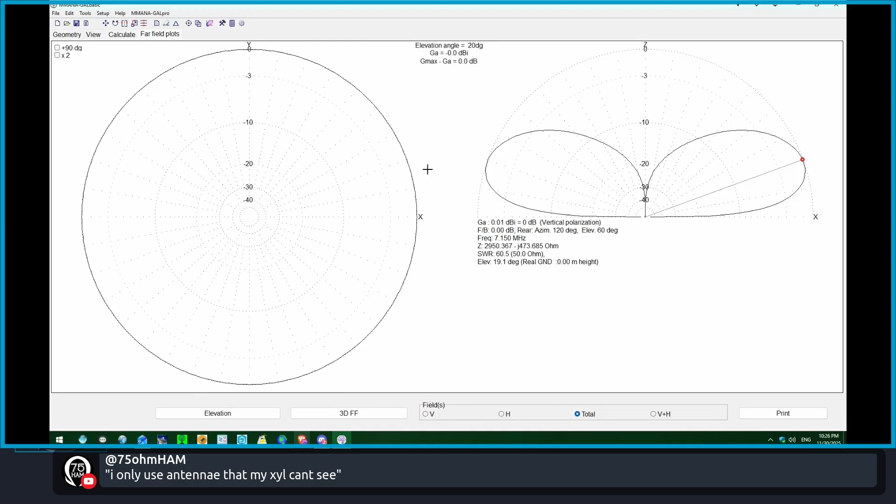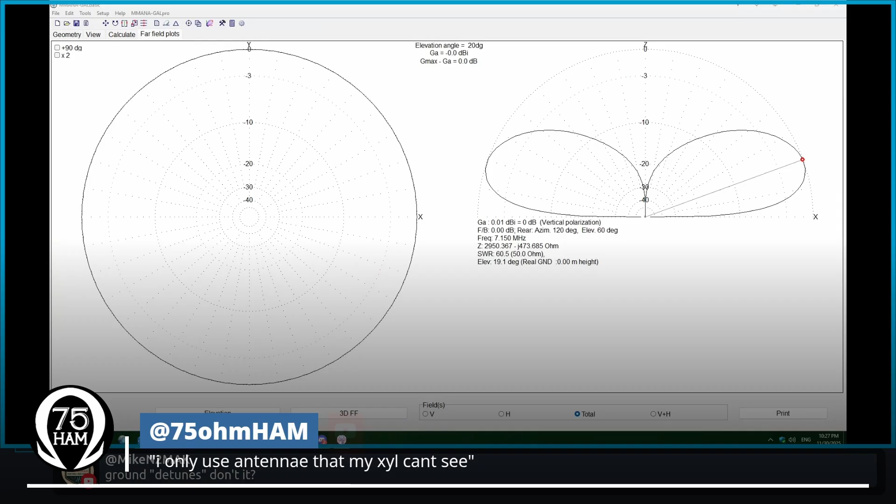I could see that with AM, there's a lot of YouTubers I watch that are AM tower guys, and they're very clear about that stuff. That's my background. Early on, doing POTA, I was experimenting with ground radial directionality. Is there anything to that? Yes, there is. And how much? If you have a 9-foot whip on the trunk lid of your car.

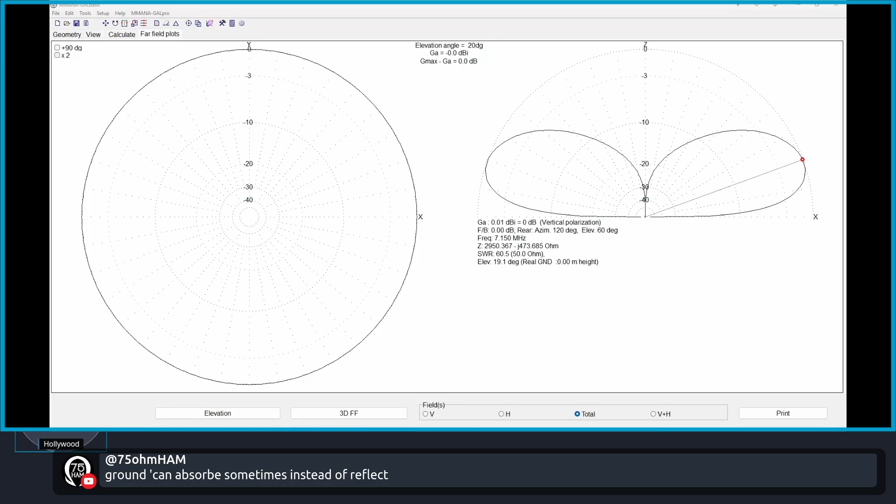What has more influence in the real world is the vegetation and the buildings around you. So if I'm at POTA and I put a wire on a branch up next to a tree and the tree is full of sap, the sap in the tree is going to influence my pattern directionality on a compass a lot more than anything else. It's going to absorb some of that radiation. Okay.

So let me give you my scenario, or what I came up with when I was doing these experiments. I had a Wolf River coil, vertical 17-foot whip. Most of the time I was playing on 20. When I was experimenting with my radial field in terms of directionality, my results were primarily just in terms of where my contacts were falling on the map.

How accurate is that? Say I spread my radial pattern east to west, and I'm seeing most of my contacts north to south. Is that safe? Should I go to that level and say they're a one-for-one, or is it too far-fetched to think of it that way?

I think it's a great question. Here's the answer. As a ham, I think what you're doing is perfect. I think it's fine. It's real world results. If you're viewing it from an engineering standpoint, it has a lot of flaws, because if your signal is going, let's say, 360 around, well, there's very few stations in Antarctica, so they can't report back to you. So it skews the numbers.

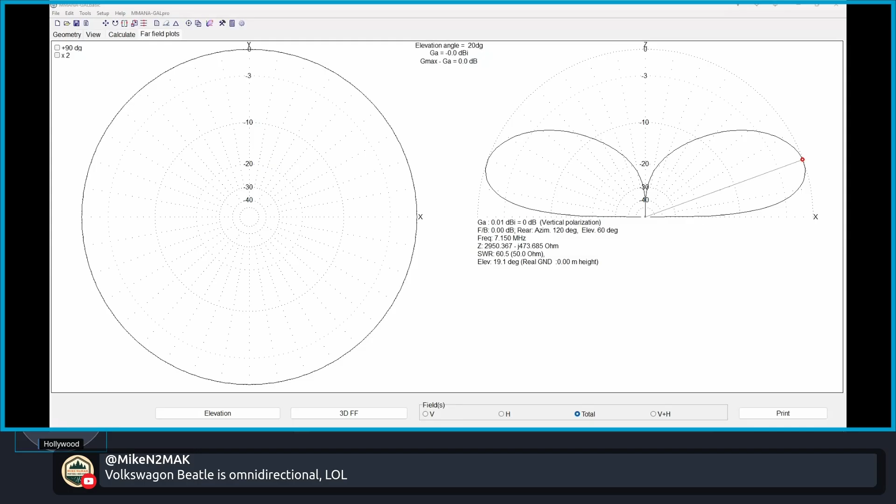Right. So the correct way from an engineering side is to walk around the antenna and plot it with a field strength meter. You get a rope a certain distance and you walk around in a circle and take measurements at every compass heading, and then you plot them out on graph paper and see where the signal is going to go. And that's what MMANA's doing. That's the picture on the left that we're looking at. Ultimately, it's giving you results based off of what you're feeding it, although in reality your numbers might be a little different using a field strength meter.

See, nowhere in MMANA does it say, put a tree here. Right. Put a building there. Yeah, exactly. It assumes you have a flat landscape. You can change the conductivity of the ground, whether it's seawater or a pasture or whatever. But it's very simplistic. And that's okay because we need to start somewhere. Right.

Yeah, because in my initial playing in the experiment space, where you mentioned seawater, I've got access to head out to the coast and can definitely measure more accurately at a beach setup than in an open field. Being in New Hampshire, we have a lot of granite, so we're very much in that dry kind of arid, with a little bit of moisture, but not as much as we'd see on the coast.

Right. So let's talk about New Hampshire radio for just a second. WGIR AM is right next to the Merrimack River. It's a directional antenna. It has to be to get the signal into downtown Manchester. It has a lot of vegetation around it. It has a lot of buildings around it. They all influence the pattern.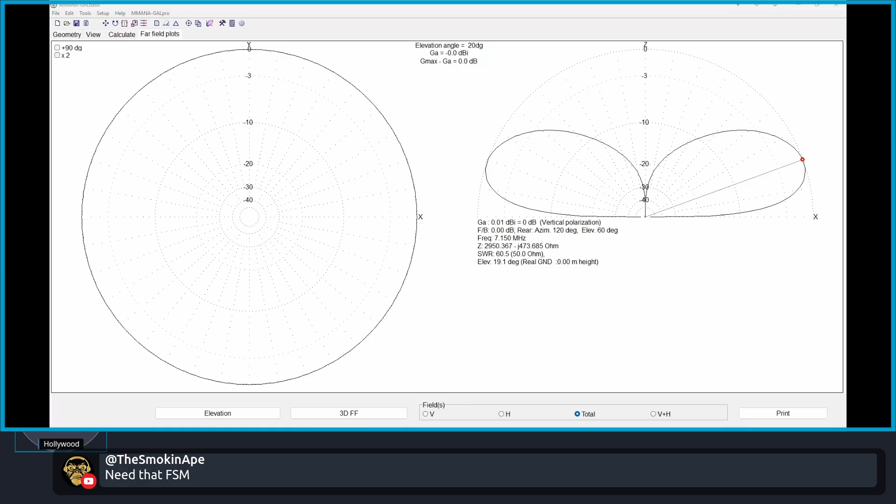Conversely, if you looked at WBZ in Hull, they're using two end-fed half waves in phase on wide open ocean. It's like the ultimate. They can't claim it now because there's so much noise from switching power supplies, but when I was there, they would claim, and it was true, you could hear them in 38 states at night because the signal was a cardioid. It beamed out west. Very little went out to feed the fishes, but it all went west.

Went on the coast. Yeah. Now, what's that antenna? So on the 128 belt over by you do it electronics, since you obviously know the area, what is that setup? I was always curious going by, do you understand what that configuration is or what they are doing? Those are TV antennas. Okay, so there's TV. You're right. That's totally different. Yeah, TV and FM. They're not, there's one AM around the block from there, but most people don't even see it.

But if you find an AM broadcaster, they're usually sitting in a saltwater marsh around this neck of the woods. That's the optimum spot. I've got one here in Yarmouth on the Cape. I talked about BZ. HDH is in, let's see. We got FEA up here in Manchester. Yep, it's right off the highway.

Interesting. So 590 EZE used to be EEI. I don't know why I drew a blank. I was there, I was an engineer for them. Edison Electric Illuminating, 590. Two towers in Medford, right by the Mystic River. So they're basically sitting in a saltwater marsh. That's the other half of the antenna. Did not know that. Interesting.

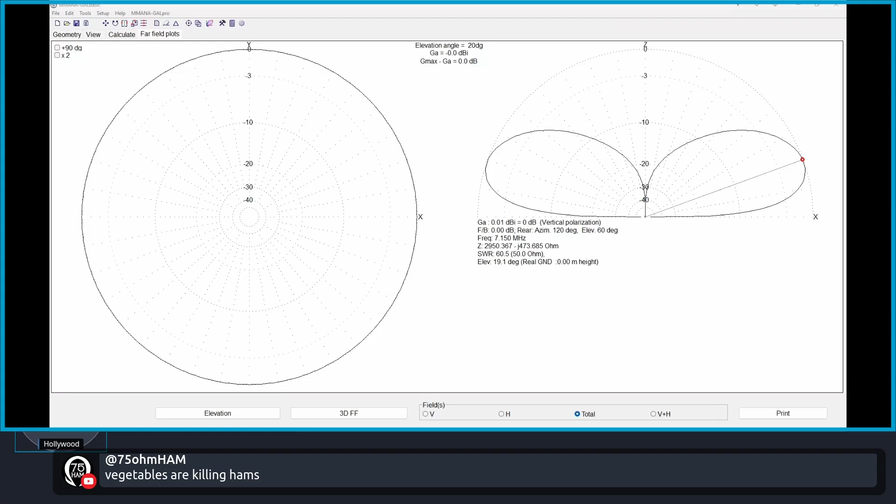Yep. And the other thing, and I can do this if I'm invited back, I hear this a lot, and it's become a running joke. I say this a lot: I only use resonant antennas. Most of the AM broadcast towers are not resonant antennas. They are not cut to resonance. They're not quarter waves. Okay? They use a tuner at the base of the tower to match the tower to whatever the 50 ohms is.

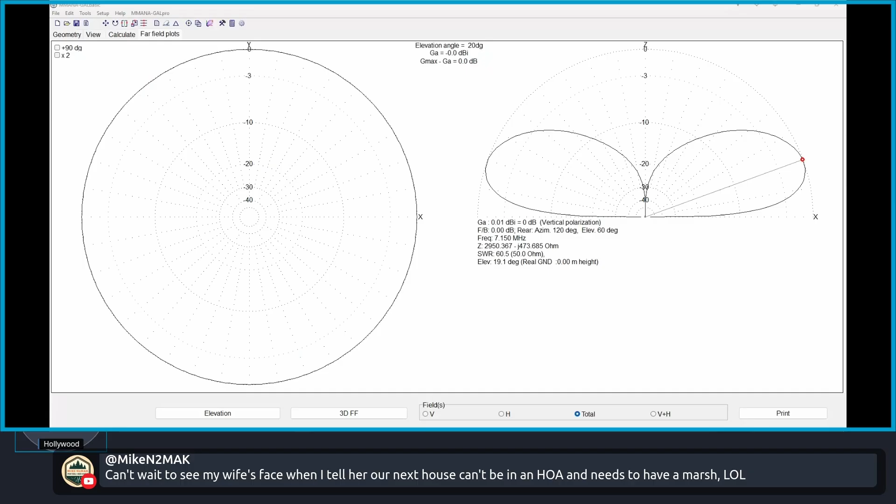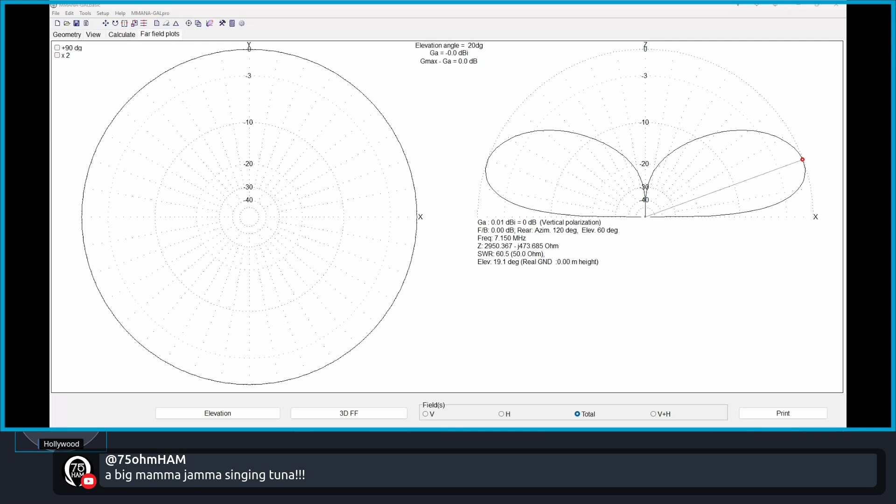So that's another reason. I know I am probably over. I'm not making it simple, and I need to pull back a little bit. Oh no, totally, don't worry about that, because it stirs our audience to ask more questions, and Mike is in there throwing zingers. You are definitely welcome back, Hollywood, because people are going to digest this, and when the episode gets released, they'll be like, oh my gosh, I got to do a lot more research. So we're going to have you back. And if Ape is around, that would be great, him on too. I'm sure Ziggy would love to jump in with this 75 ohm thing, and then their heads will be spinning. I've given you a crash course and threw a lot of material at you. There's no quiz, no homework.

Well, exactly. Wow. I dabbled when I started paying attention to DX Commander and Callum when he was doing a lot of this modeling. And when I dove into MMANA, I was like, oh boy, it's definitely an engineering tool in the way that engineering tools are written. If you don't understand the symbols and don't have the time to read the engineering manual, you're going to get lost fast. But it's a very useful tool because it helps uncover the black magic, the mystery. What makes the thing work?

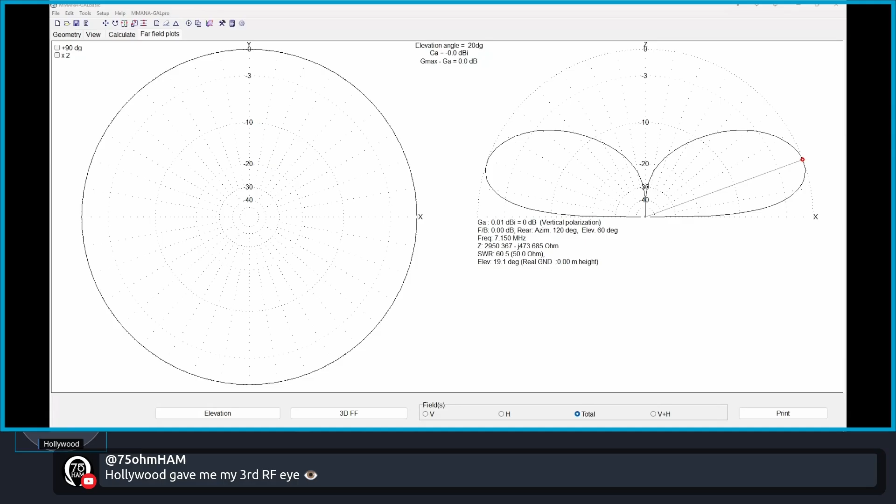The antenna. Once you get to see it for what it is, just the basics, you don't have to be an engineer. Once you see the signal goes down the wire and comes out, why does it come? What is it doing? Then you start building your own antennas, and you're no longer on a chain with a shackle tied to your leg going, I have to get this certain model. No, you can be a MacGyver. You can make anything radiate. Yeah. It's funny, because when it hits the fan, you're going to need that skill.

Well, this is kind of the struggle, and I'm probably not alone. I've been a ham for 30 years, and this is still an eye opener for me. I can only imagine the new technicians that I see all the time, and I encourage them just to get on the air. When we start talking about this stuff, it's like I was told to study the questions, and that was it. And then you get into this, totally.

Like really, and so this is always good to drive home, I think, consistently over and over again. So, to get back to my point, we're definitely going to have you guys on more, just because it will start to sink in. And then eventually Todd will start having more and more questions because this will all of a sudden click for him and it'll be like, oh, this makes sense.

Well, he answered a question I had when I was a kid. I grew up in New Jersey and I used to get WBZ at night. Yes. On my little AM clock radio. And sometimes I'll get 1010 WINS here. Yes. In New Hampshire, out of New York. And it's only at night, though. And that explained it. When I was a kid, I was like, wow, this is pretty cool, I can get Boston from New Jersey. Oh, it's a trip. It's a trip. Yeah.